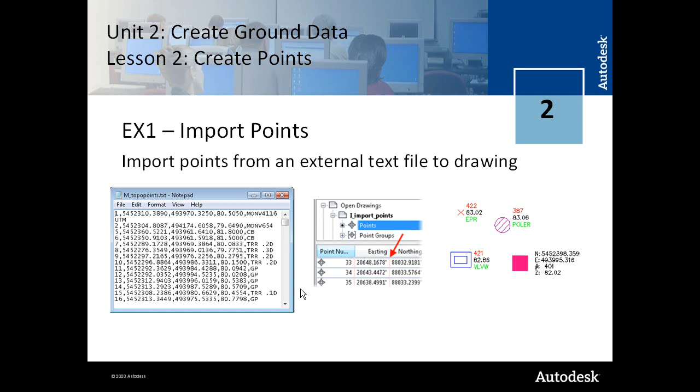In Exercise 3, you learn how to create points manually, and then in Exercise 4, we create point groups. So for Exercise 1, we import points from an external text file to a drawing. Here's the text file, and this is what the points look like in Prospector and then when they're in the drawing. And you create points using the Create Points toolbar. So let's have a look here.

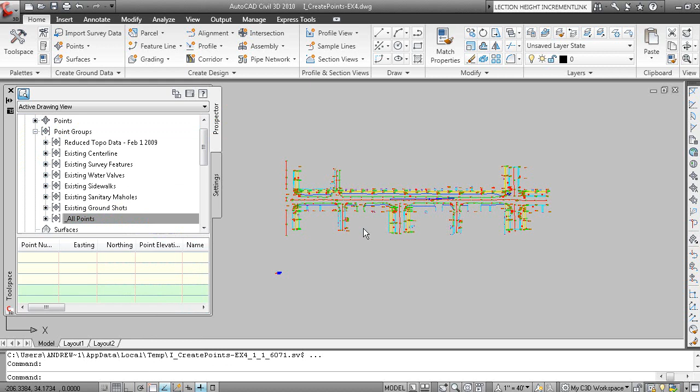We have a number of points in this drawing already. I'm just going to go to the All Points point group and delete all of the points. So we have no points in the drawing. And once we've cleared out all of the points, we can then explore some of the point creation routines.

If you right-click on Points in Prospector, you get the Create command, which displays the Create Points toolbar, and there are a number of ways to create points here. The last button on the toolbar is to import points. Similarly, on the Create Ground Data panel, you can go to Points, and there's the Point Creation Tools, which will display the toolbar, and all of the commands on the toolbar are also available here, including the ability to import points from an external file.

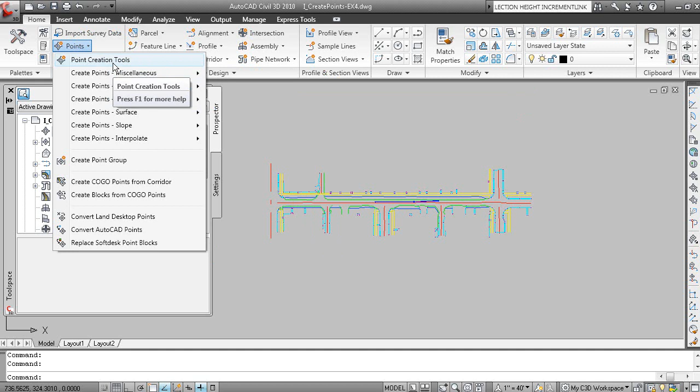So let's go to Point Creation Tools and import points. The format is a PNEZD comma delimited file. Just so we can have a quick look at that file format, I'm going to go to my working folder here for Create Ground Data, and then under the Data folder, Creating Points, we have a topo file here, which is a text file. And there's the point number, northing, easting, elevation, description, comma delimited.

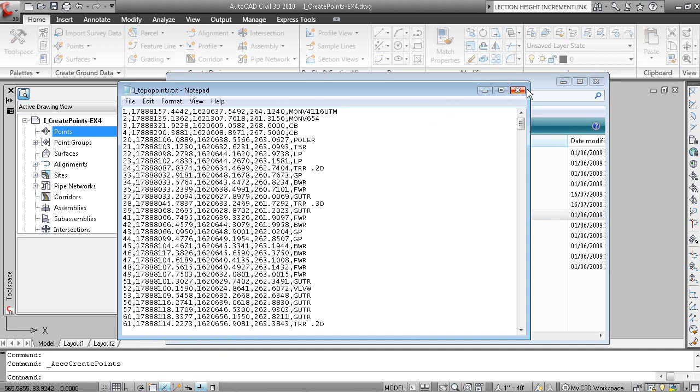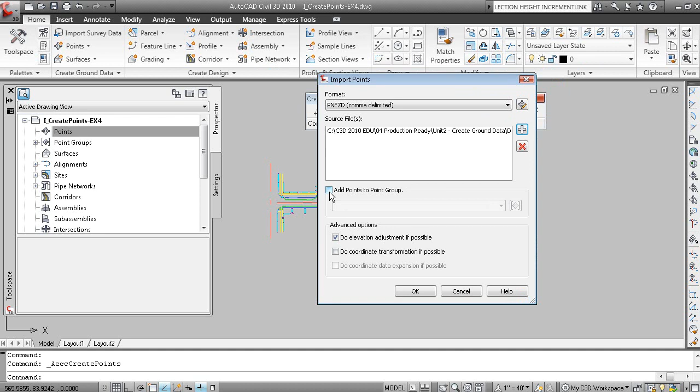And we can now go access that file, and we'll go back to C drive and into the working folder, and we'll just bring in the topo points. We can add those to a point group if we like right now. Click OK, and those points are now inserted to the drawing, and these are now listed in Prospector in the item view area.

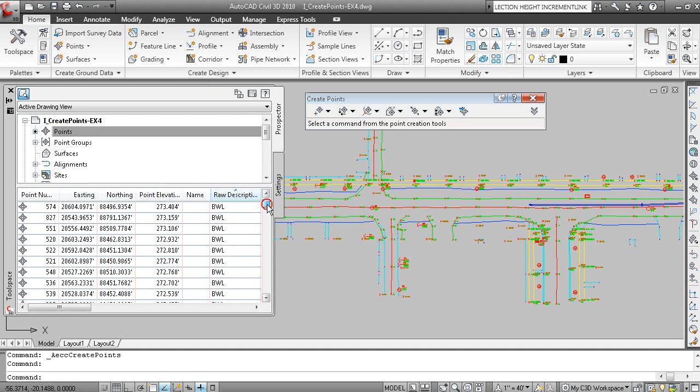You can sort by the point number, you can sort by any column header, sort by the raw description column header, and you can even zoom to a point. So if I want to go to this point number 70, I can right click and zoom to point 70, and it takes me right to that point. The reason why we cannot see the point numbers is because of the style.

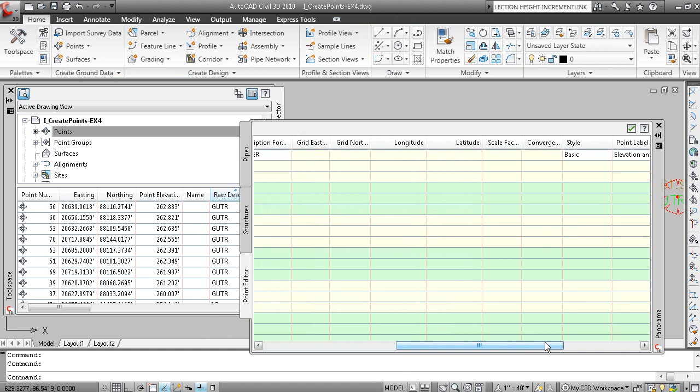So if I was to grip this point, right click and edit points, if we scroll over, you'll see that the point label style is showing elevation and description. We can change that to show point number, elevation, and description. And there's the point 70. Okay. So there are the points in the drawing.

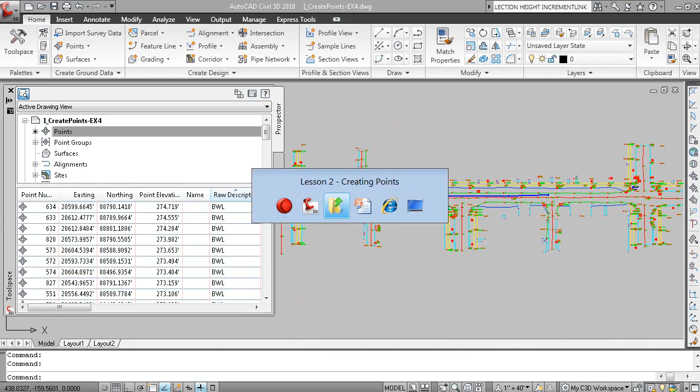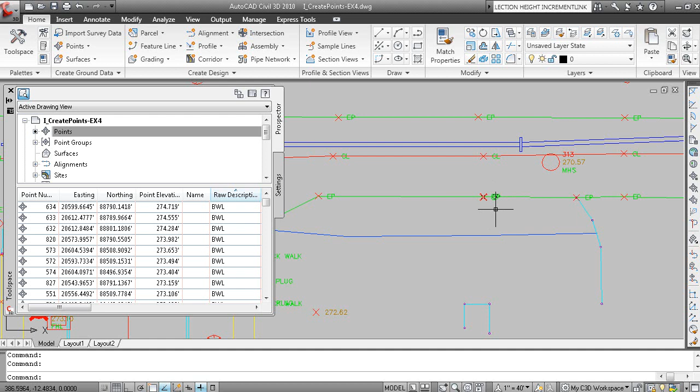If you go back to the PowerPoint, you can also create description keys, and the description keys are essentially lookup tables that will assign an alternate point description, assign point styles and point label styles, and assign points to a layer, and they will also scale and rotate points. So that's why some points have different symbols and descriptions, and this one's showing just the elevation, these are showing just the description, this one's showing just the symbol, this one is showing a cross with the elevation and the description.

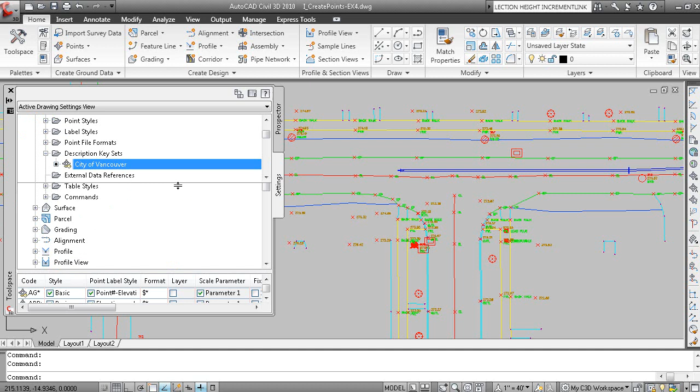And description keys are found under the Settings tab of the Toolspace by expanding Point and Point Styles, and Point and then Description Key Sets. And here's one called City of Vancouver. You can either view it in the item view area or right click and select Edit Keys to display the description keys in the Panorama window.

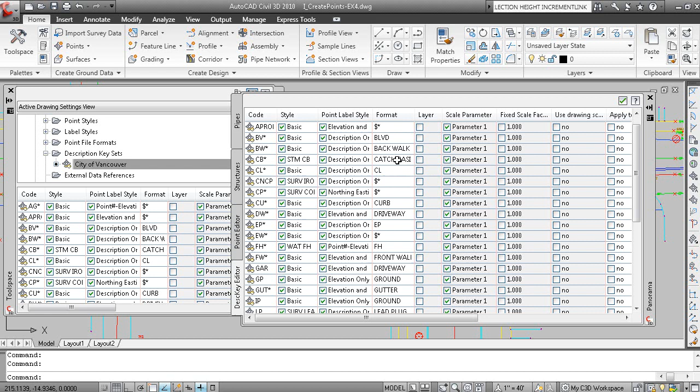And here you have the field code or the code in the file, the assignment of the point style, assignment of the label style, the assignment of an alternate description, then optionally the assignment of the point to a layer. So you can see for catch basin, the style is storm catch basin, and the label style is description only. And the format is catch basin, so this would be the alternate or the full description.

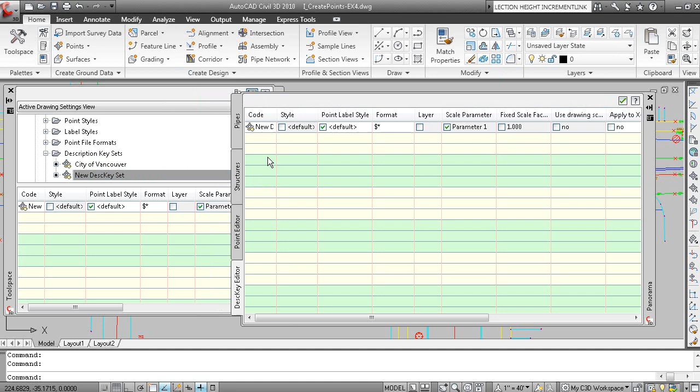So you can create a new description key by right-clicking and selecting New from the menu, or you can create a new description key set, which is a collection of description keys, by right-clicking and clicking New here to create a new description key set, and then make a new key in that description key set. Okay.

And here is some more information on description keys. Of importance is that they are stored in the drawing template file, and the processing for the description keys. So you create the point, and then it checks the raw description, and if it matches the description, it assigns the point style, the label styles, and the layer. Otherwise, if it doesn't find it, it assigns the default point style, default label style, and the default layer.

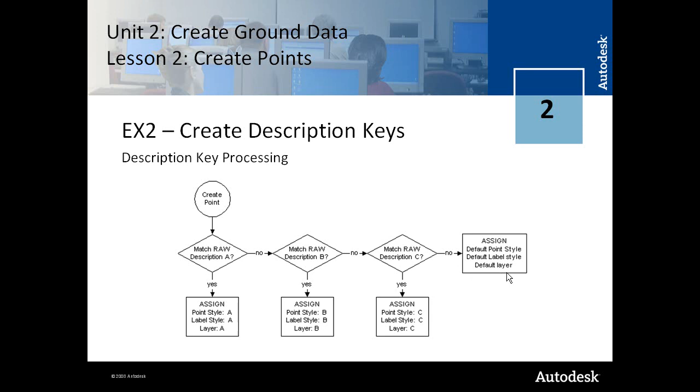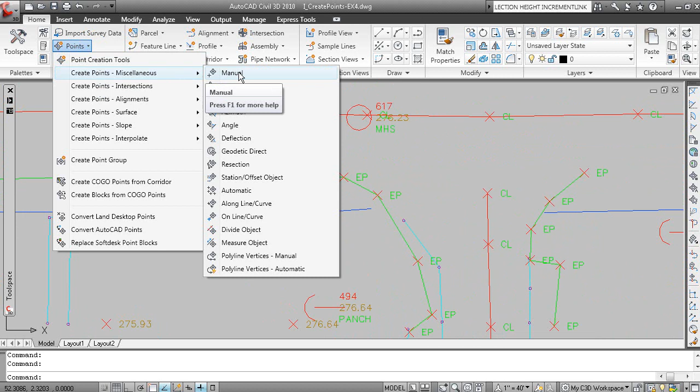Exercise 3 discusses the manual creation of points. So let's create a catch basin that was forgotten on this intersection location. We can create a point manually by going to the Points menu under the Create Ground Data panel and using the Create Point Manual command. Or under the Point Creation Tools, we have the same command available here. Specify a location for the point. I'll do a midpoint OSNAP MID, and we'll pick a location here.

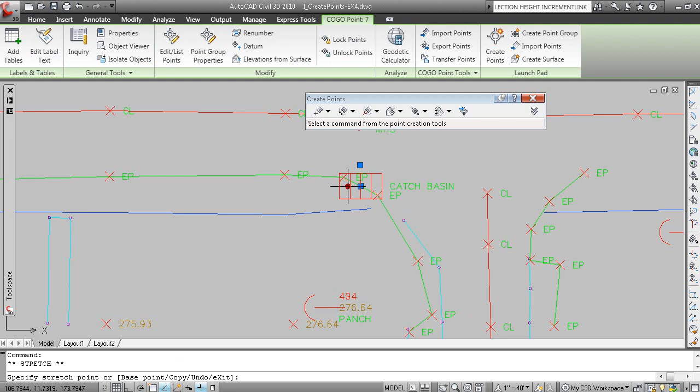And the description will be CB, and the elevation, I'll just put in any elevation for now. And you'll notice that the catch basin symbol came in. That's the actual point object, and then you can use the grip here to rotate that catch basin symbol. So that was the description key set that assigned the full description of catch basin to that point and inserted that symbol or used that point style.

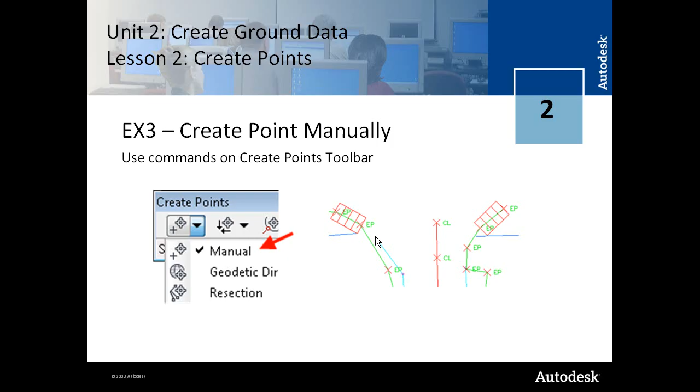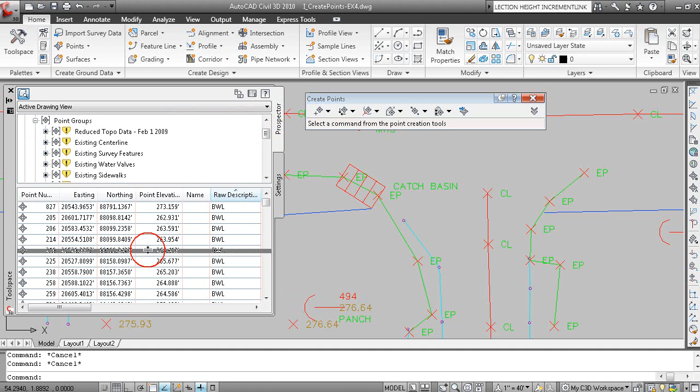Point groups are used to organize points into logical packages. You typically want to make point groups for your major features: sanitary, sewer, sidewalks, water main, that sort of thing. And if we go to Prospector, you have all the point groups here. Now these point groups are out of date just because we deleted and added points, so you need to right-click and update these point groups.

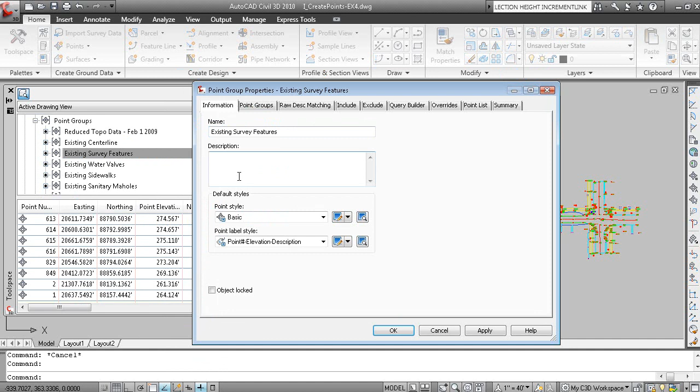So for example, existing survey features contains the lead plugs and the monuments, and if we were to right-click on that and select Properties, we're using an inclusion criteria for lead plug and any description beginning with MON. Now I can click the Point List tab and you can see the results of that query.

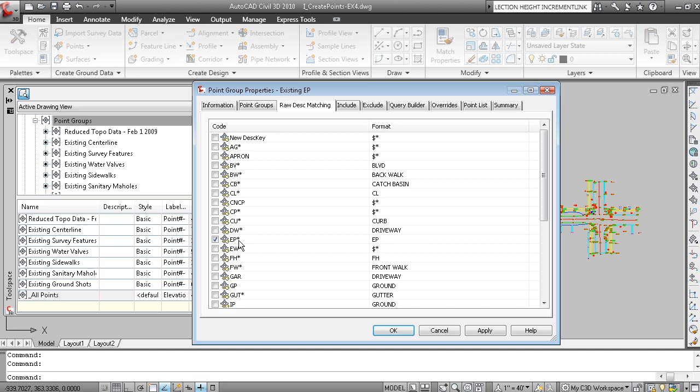So we can make a new point group for existing edge of pavements. I'll make a new point group, and let's call this Existing EP. And under raw description matching, we can choose this, the EP star. This is actually your description key list, which when you choose that, it will develop an inclusion criteria of EP star, so any description beginning with EP. Notice that you can also use an exclusion criteria. We'll look at that in a moment. And under the Point List tab, you can see we've grabbed all the EPRs and the EPLs, and that is now my Existing EP point group.

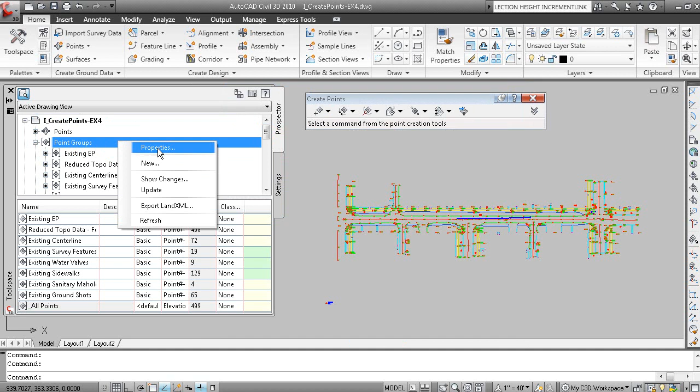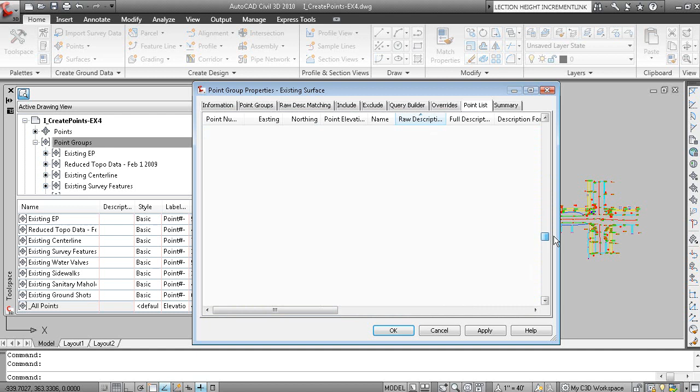If we were to create a point group for surface modeling, we could right-click and select New and call this one Existing Surface, and here we may choose to use an exclusion criteria to exclude things like manholes or valves. So what I normally like to do is include all points, click the Point List tab, sort by raw description, get an idea of what my descriptions are, and then I can see that we have some fire hydrants, FH star right here, and we have some other monuments perhaps that we want to exclude, and lead plugs.

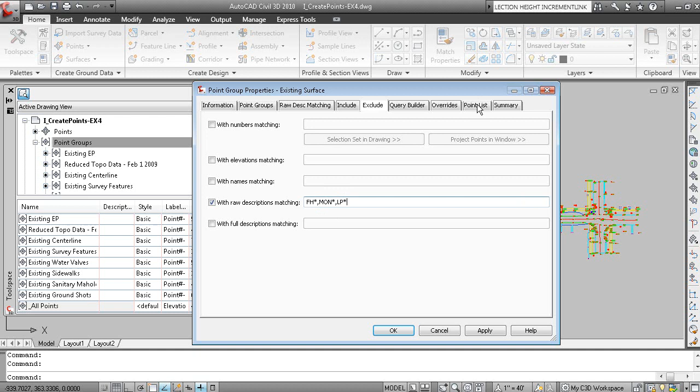So I'll go back to the Include tab, turn off Include All Points, and then go to the Exclude tab with raw description matching FH star, MON star, and then LP star, and the star is just the asterisk, just a wildcard. So now my point list excludes all of those points that don't represent the lay of the land. And there we go. So now we have a point group for existing surface modeling that uses an exclusion criteria.

And that concludes the 4 lessons in Unit 2 that address the creation of points.